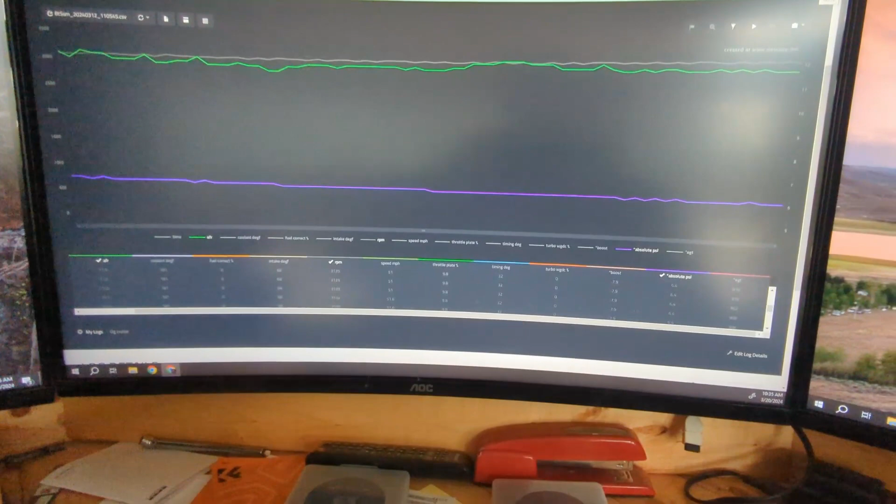Hey guys, you want to see how I use this old laptop, a USB adapter from Tactrix, a tablet, and a PC to tune my truck? Well, I'm going to get into it here now.

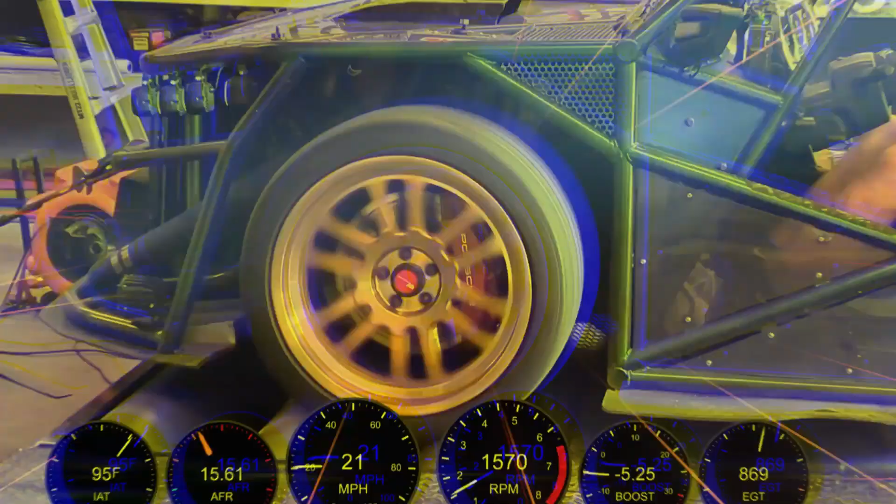Hey guys, today I'm going to give you a quick rundown on how I basically touch up the tune on the truck every once in a while. Now the program I'm running is called Carberry 4.2. Most of you Subaru guys have heard of it. If you're not a Subaru guy, you've probably never heard of it.

But basically it's an updated firmware program on the engine computer itself, derived from an old JDM Rallycross programming that they used in the actual stock ECU of the car. Subaru's always kind of been pretty good with the stock ECUs. Even today, most people still use the stock ECU with an Accessport or something, but I'm still old school. I have a 2002 WRX ECU in my truck and the purple truck,

and they both run the Carberry ROM. And basically how it works is it just breaks down all the stuff you would want to tune in the ECU. Your launch control is a new option. I got an engine light that will blink when I'm getting knock. All the flex fuel stuff's in here. Speed density. I mean, it's a very powerful thing for being 20 years old. Well, Carberry's not 20 years old, but the ECU's 20 years old.

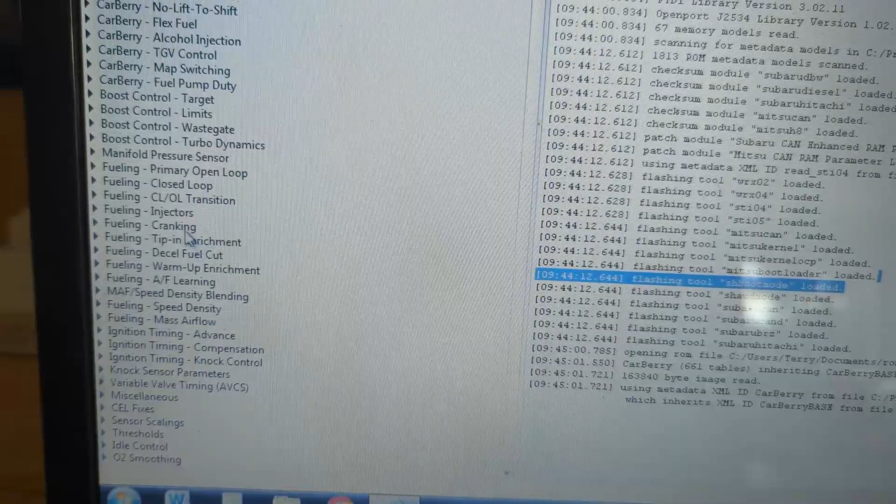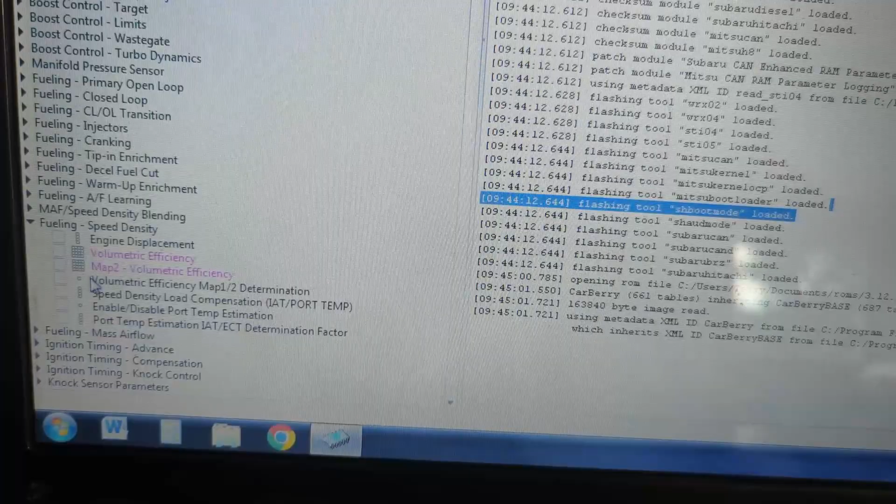Tip in, decel. This is overrun to some newer guys. Warm up, AF learning. I don't use AF learning. My wideband hasn't been reliable enough to use that. And then speed density. This is basically where I make fueling changes. Now you got two. You got your base one. That's for pump gas, and then you got map 2. And that's for ethanol. And then this little guy here tells you which one of these for flex fuel.

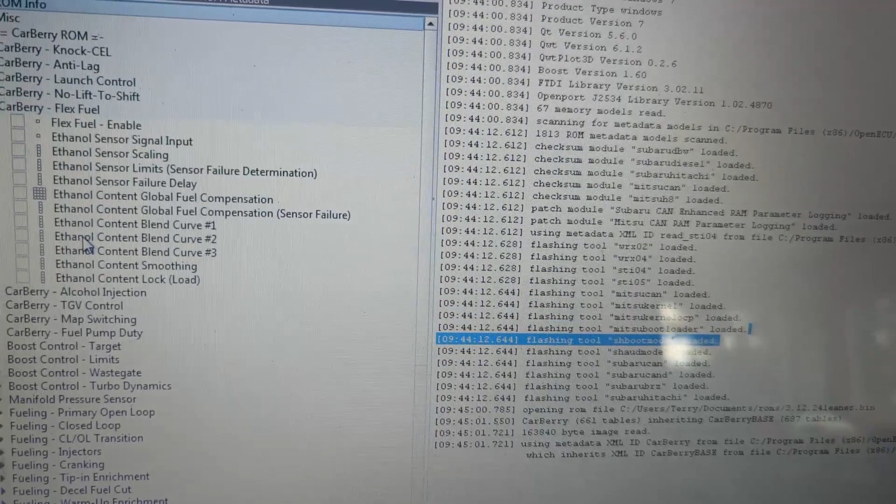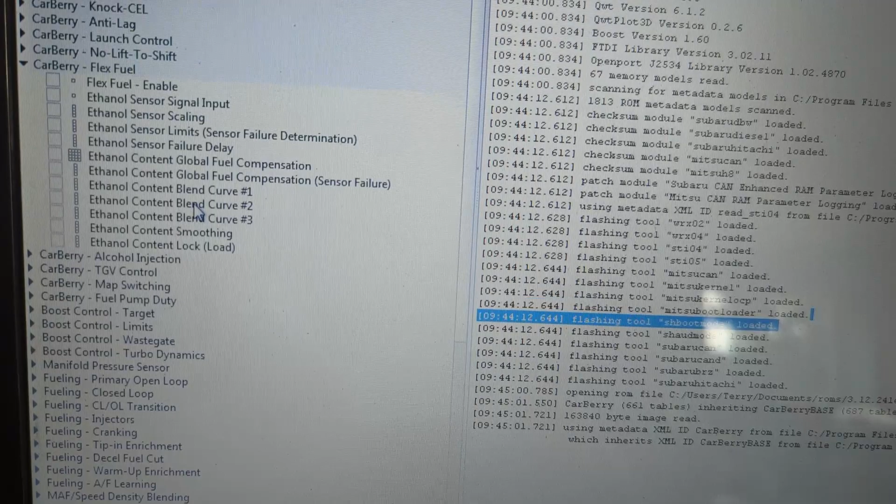Up here I can set up different curves. So if you wanted boost to come on faster than fueling, then you can set up a number 2 and say, hey, I want full boost at 50% ethanol instead of 70% ethanol, like if you'd use curve 1 for fueling, because it lets you set up linear curves or non-linear curves based on what you want to do, which is a nice feature. It's actually a really nice feature.

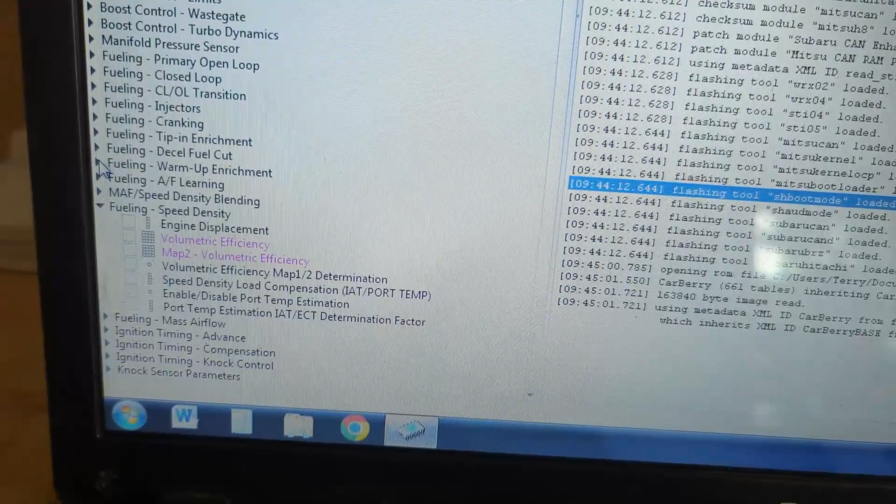So your boost doesn't have to follow a linear curve. Like at 50%, you can run full boost if you want, or you can set it back so you only run full boost at over 80% ethanol. It's all up to you or the tuner. But now you're wondering, how do I know what to change? The speed density table I've been working on a long time.

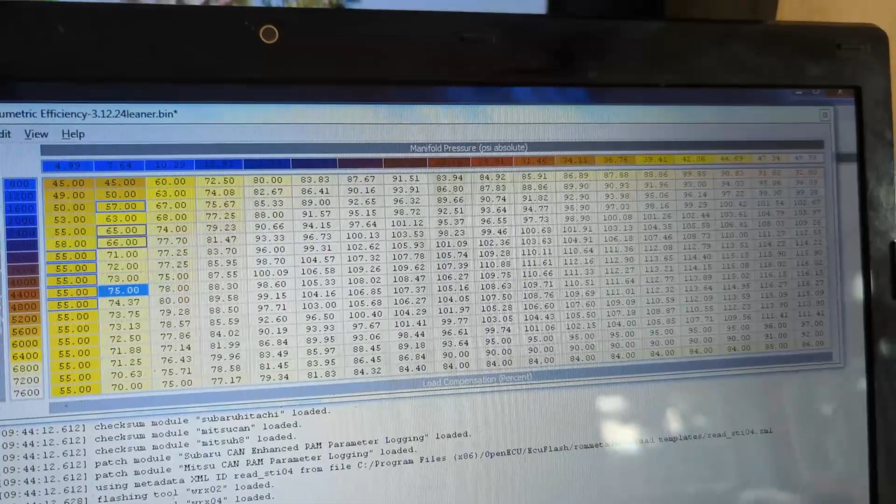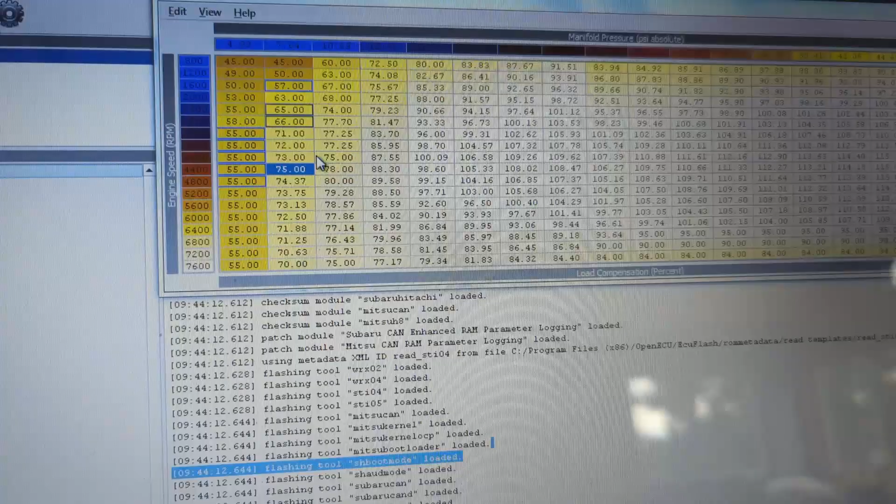You can see these. This is ECUFlash. You can do this in RomRaider too, but I've just gotten used to using ECUFlash because I open it and then I flash it right. This program will open it, edit it, and flash it back to the car all on its own. I've been learning the GM LS stuff. You need like 5 different apps to do this.

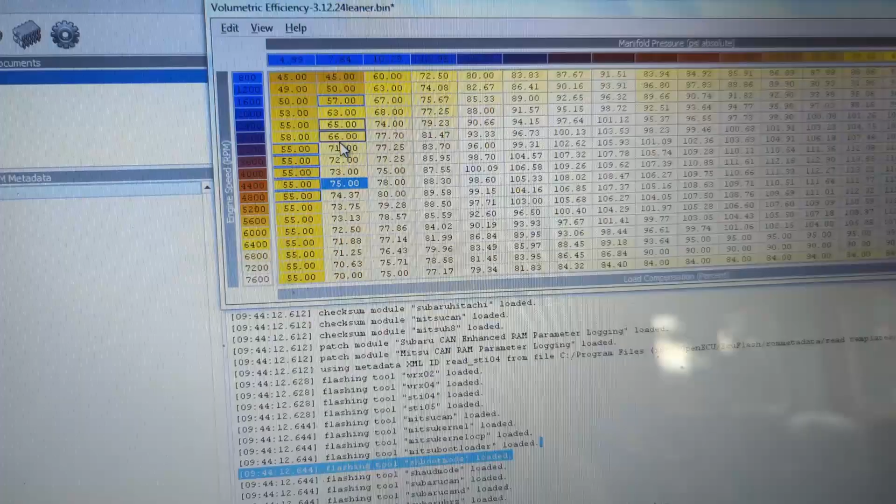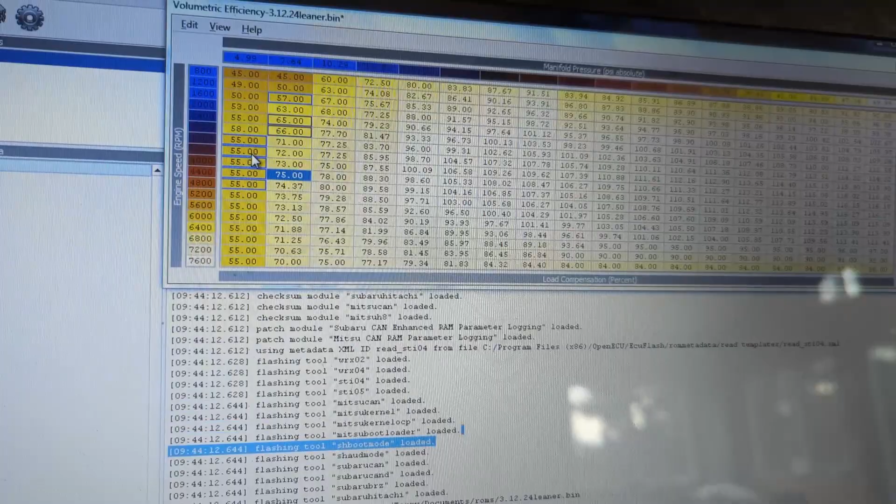But these little changes here I made are just some cruise stuff. I was watching AFRs while I was just lightly cruising down the road the other day, and I noticed that they weren't quite right.

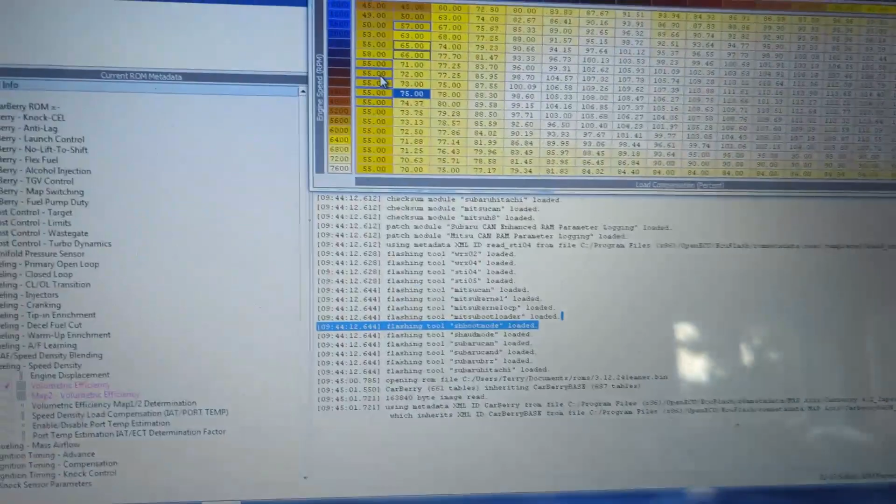This ROM was initially tuned by me, and then once I got over 500 wheel horsepower, I took it out to Nate at TPG, who ran it on his dyno and tweaked the timing, the ignition timing map, stuff you can't do on the street, to really dial these in. Trying to get the most power out of them: do you have too much ignition timing, you're just wasting cylinder pressure, or not enough, you're raising EGTs and wasting power.

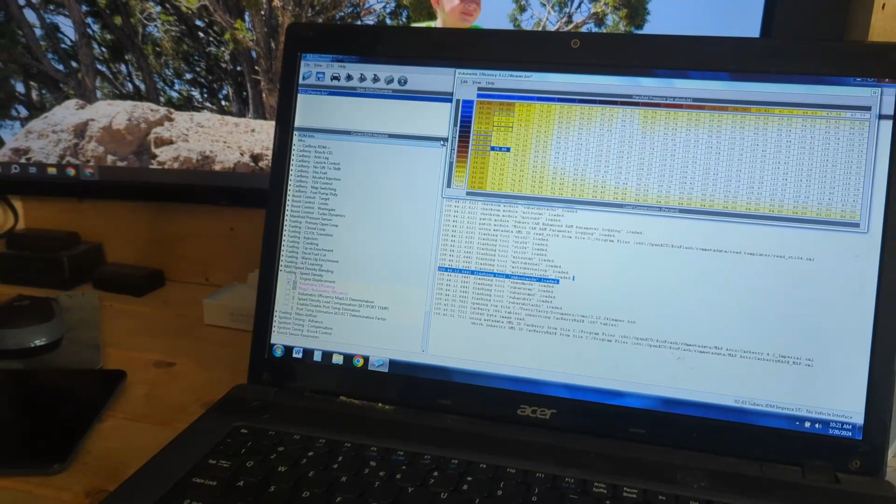So it went on the dyno and got tuned up, but that was when it was on a 450 fuel pump with 6 AN lines. It did make 519 wheel horsepower, I think, on E70, but it was starting to lean out up top. I ran it like that for a while, and then into the summer, as ethanol contents got higher, into the 80%ish, 82% ethanol, it was really getting lean up top. So obviously I had to fix that.

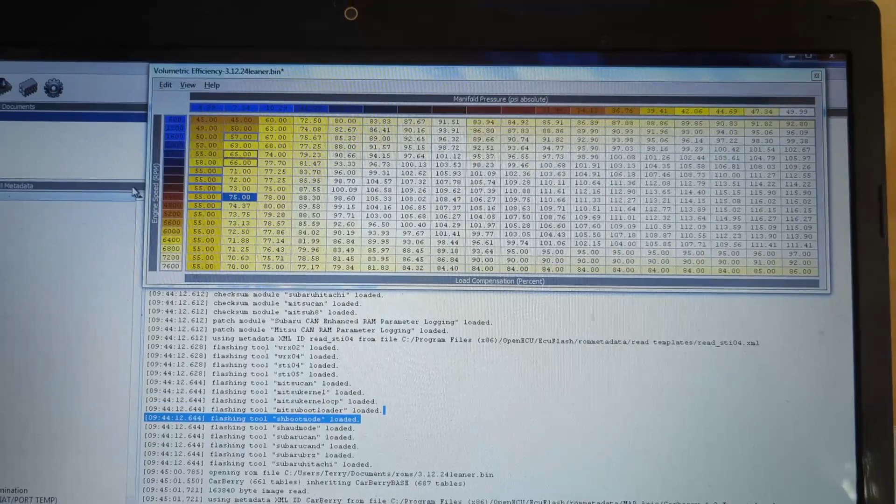I put in twin Hellcat 525 pumps, also known as the Walbro 470s, and then I put in 8 AN lines and basically revamped the whole fuel system. And what that did was completely screw up the pro-tuned volumetric efficiency table. I was way over VE'd on most of it, because it was trying to make up for the lack of fuel pressure up top. So I've done all that.

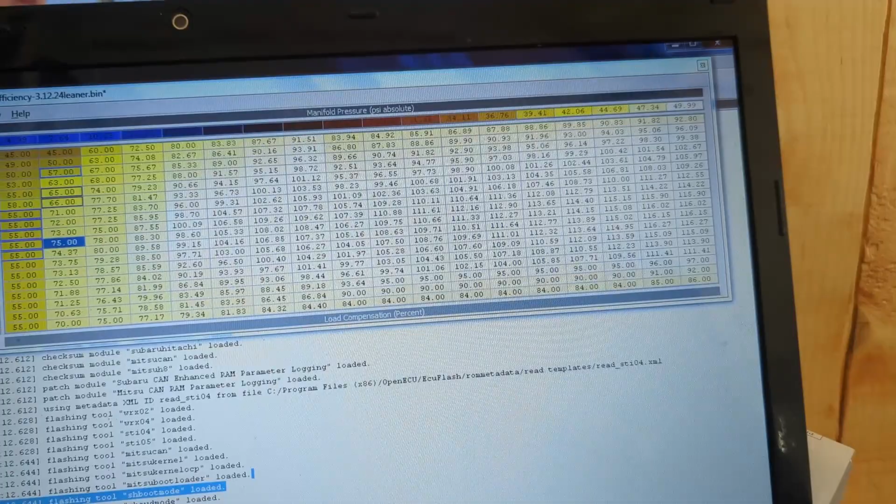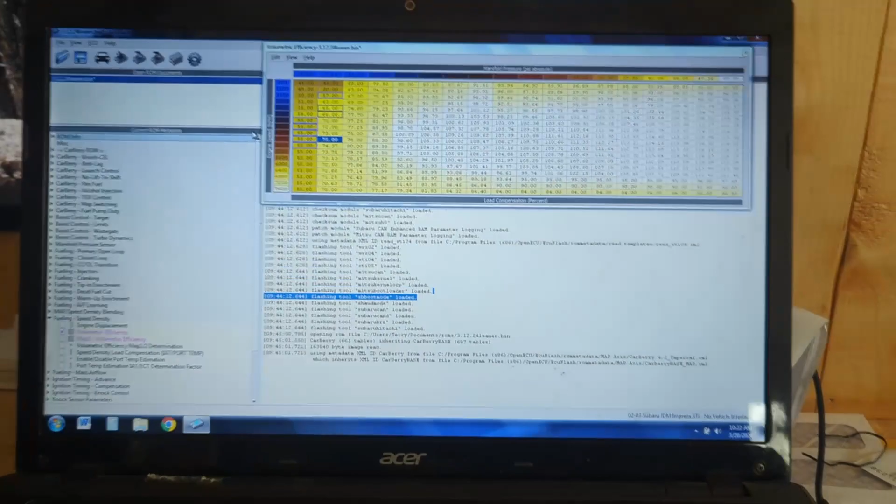Basically I focused on up top stuff at first because it was a priority, then I let it go for a while, but lately I've been focusing more on the drivability stuff. And even though fuel pressure is the same, I guess the flow, maybe the 8 AN lines, the whole map became too rich. So now I'm leaning out areas.

And how I noticed that is I run an app called BTSSM on this tablet. Some of you guys have probably seen it in the truck. It's not connected now, so I gotta manually connect it. Select vehicle. Okay. And these are basically the gauges I run all the time. As soon as I start the truck, the USB input senses the extra power and automatically runs this program.

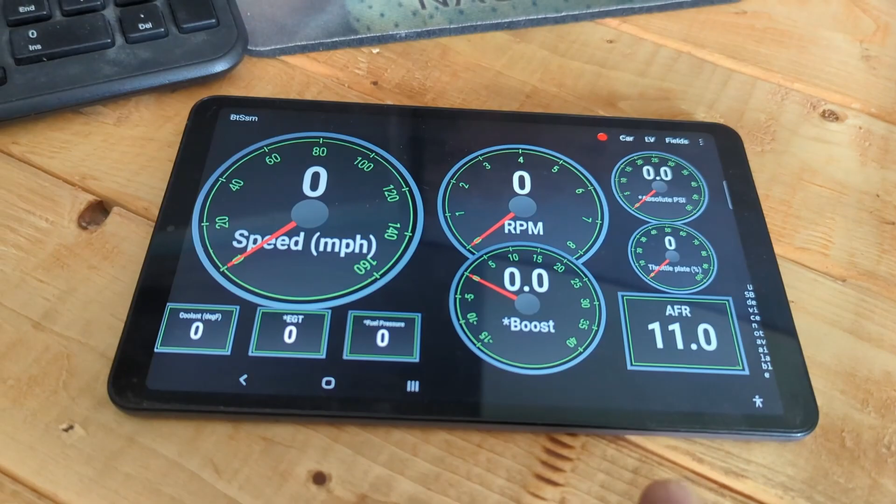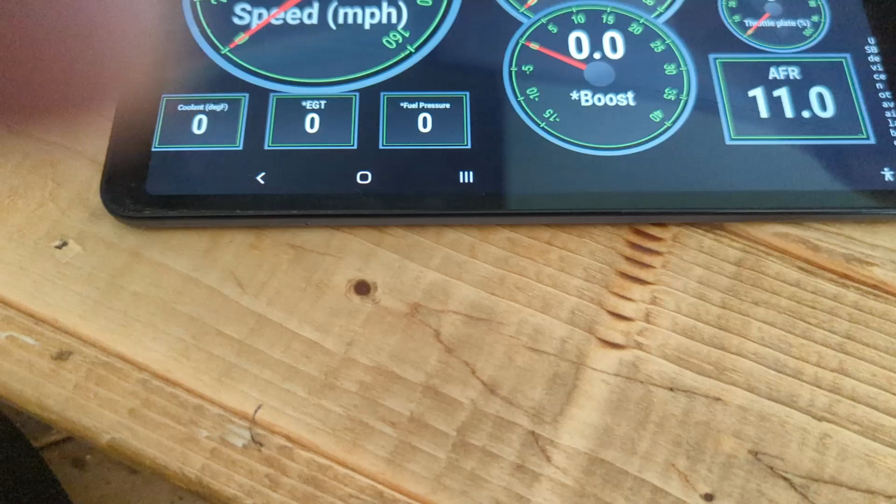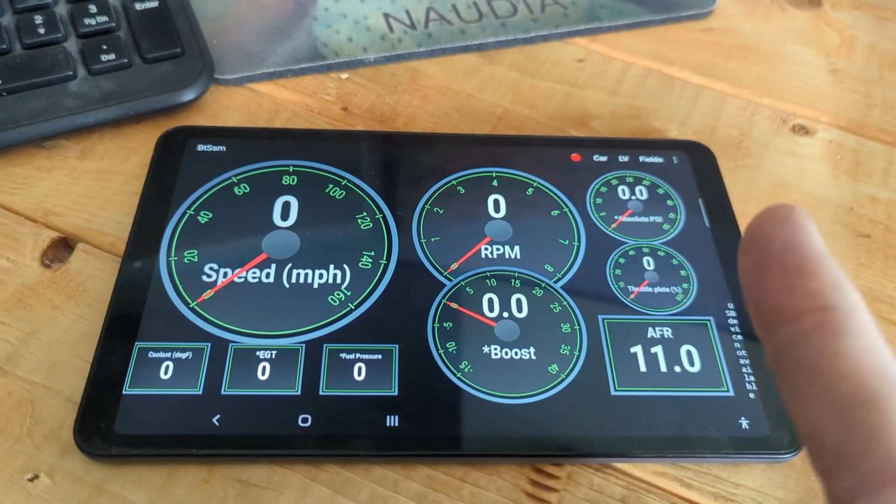And on the steering wheel, you'll notice I have a little green button down there. I push that when I want to log something, and this screen will turn yellow, but you can change the color. It saves it into the program, into the tablet. And this is a 5G tablet, so I can upload it whenever. But if you don't have 5G, once you get on Wi-Fi, you can go to,

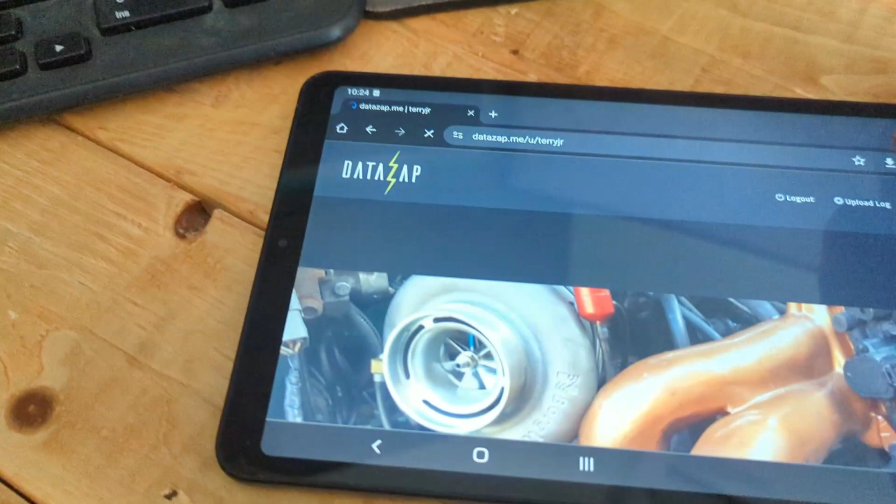what I use is Datazap, and from there, oh, didn't want to do that. Gotta hide my login real quick. From there, you can hit upload log. I'll just use the top one, CSV, then hit browse, files, and my recents are right here, and you can upload that. And go back to here, and you get a log file.

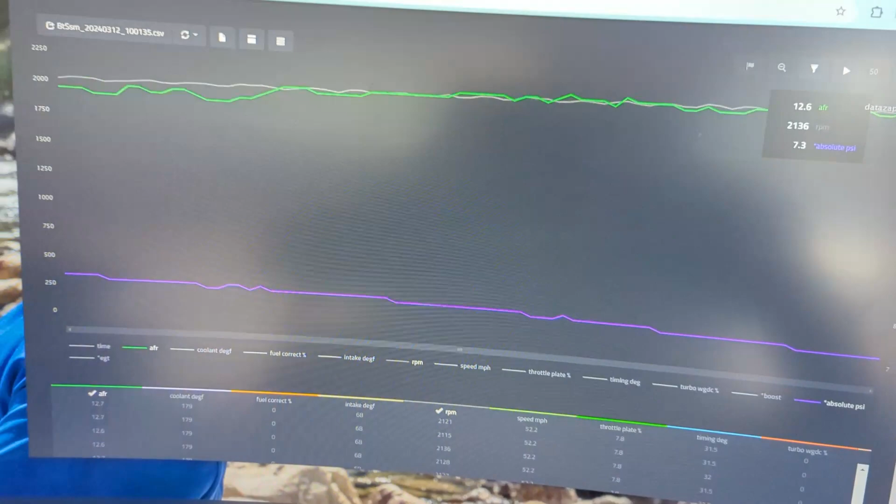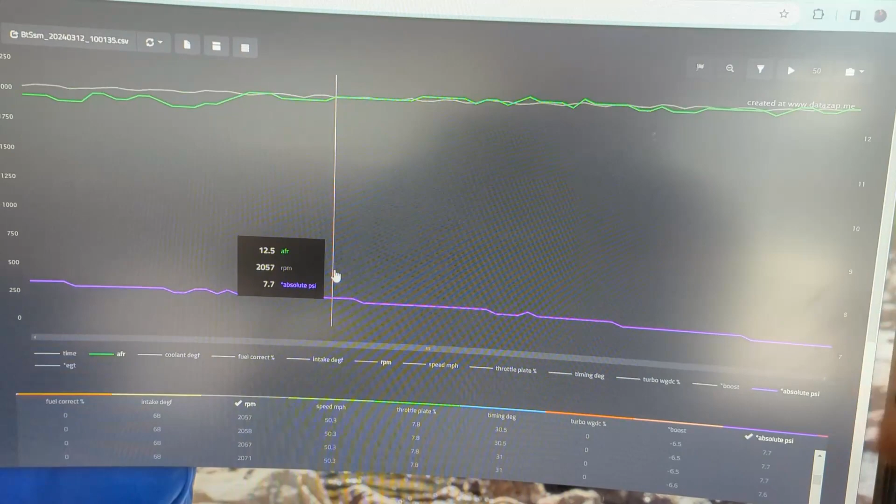I don't really use the tablet to look at the logs. I'll go onto the computer since you just uploaded it. Like this one here, see it, 2,000 RPM, 7.7 pounds of absolute pressure. Now that's absolute, so it's actually like -7 PSI. It's in vacuum while you're cruising. I'm at like 12.5 AFR. So I look at that.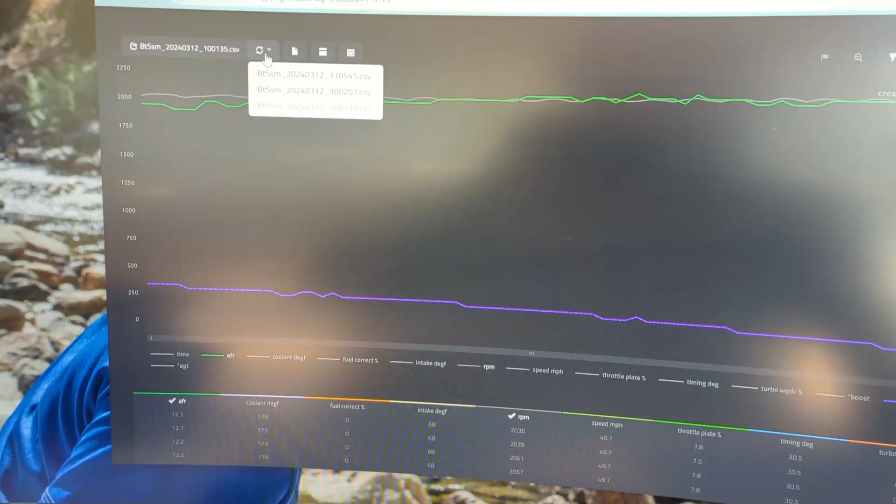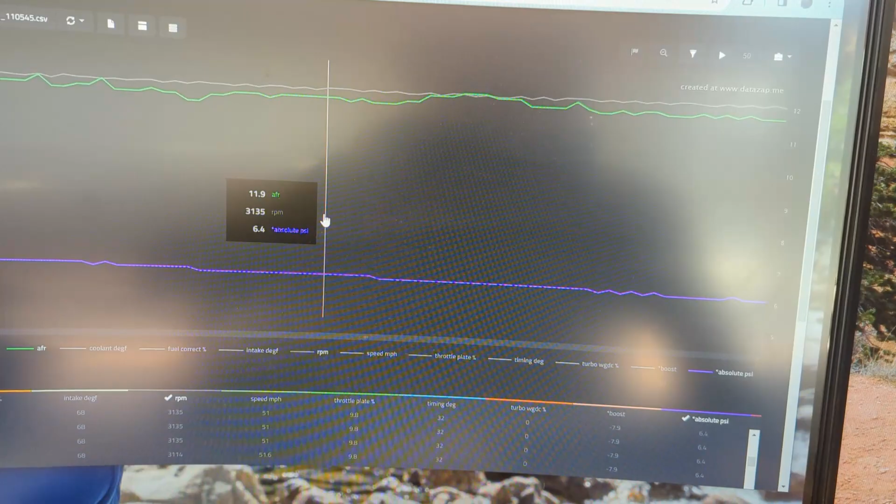I've also recorded a couple different versions. Is this weird? There's another one here. Where'd it go? Notice on this version at 3,000 RPM, pick AFR, pick absolute PSI. Must be another one. It's still rich here too. So I go on my little guy here and say, alright, at 3,000 RPM, let's say I was at 71 VE, I'm too rich. You can calculate it out.

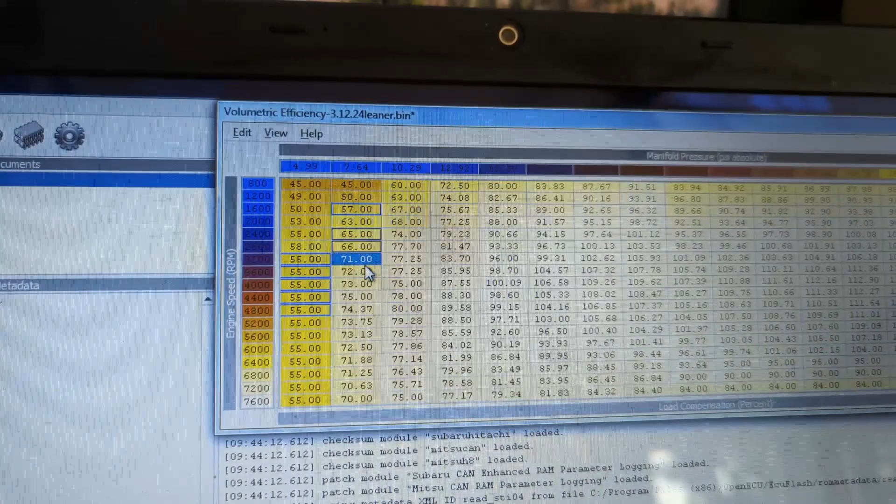You know, you take your AFR divided by your VE, and then you use that as a multiplier for the 71. But I found that to not be too accurate. It always seems to be too much. Like 12.5 or 12 divided by might be like 15%. If I took 15% off of this, I'd be, let's just say, around 60, and then I'd be way lean. So I found out it's about half, but I kind of just fudge it.

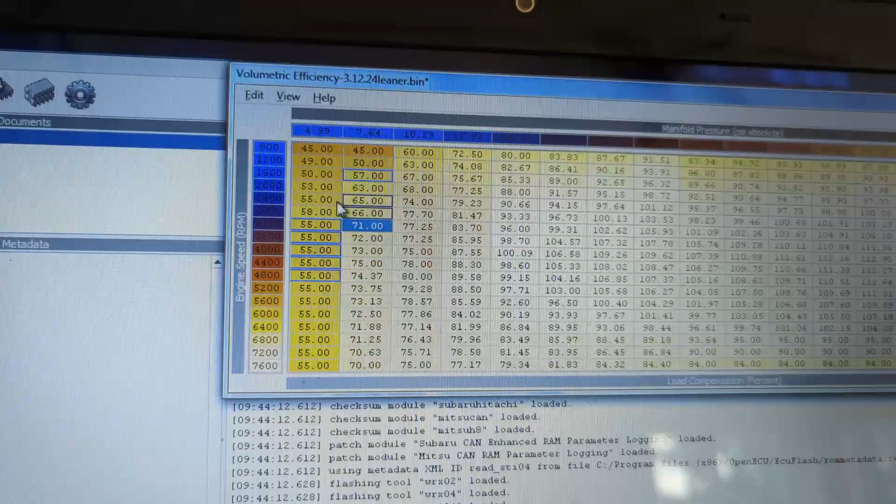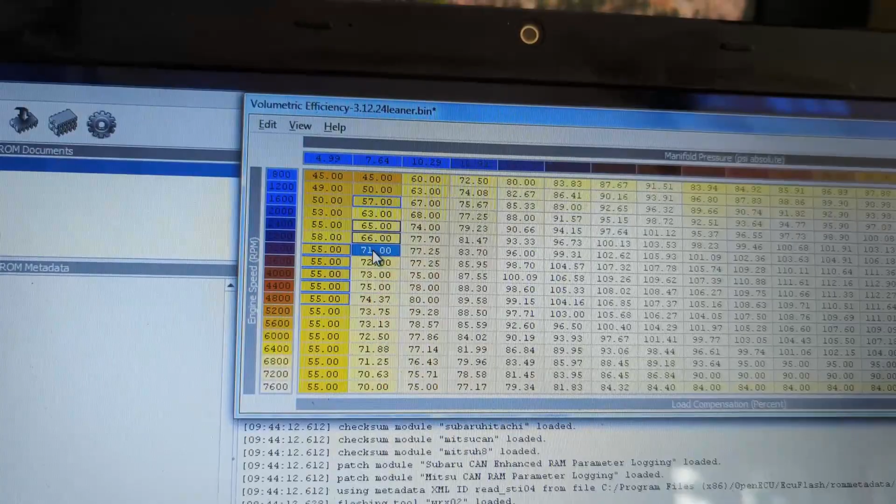Let's say if I'm at 12.5 AFR here consistently, and I want to be at 14.5, 14.7, depending on the fuel I'm using, I might drop that to like 66, like I did above. So that's just how you do it. It's a lot of playing around. I mean, more experience obviously would help.

You run this, you can run it through some programs. There's some spreadsheets out there and stuff, but I never use them. I have the computer, I got the Easy Logger, I have ECUFlash, and I just do trial and error. I'm just constantly playing with it. It gives me something to do.

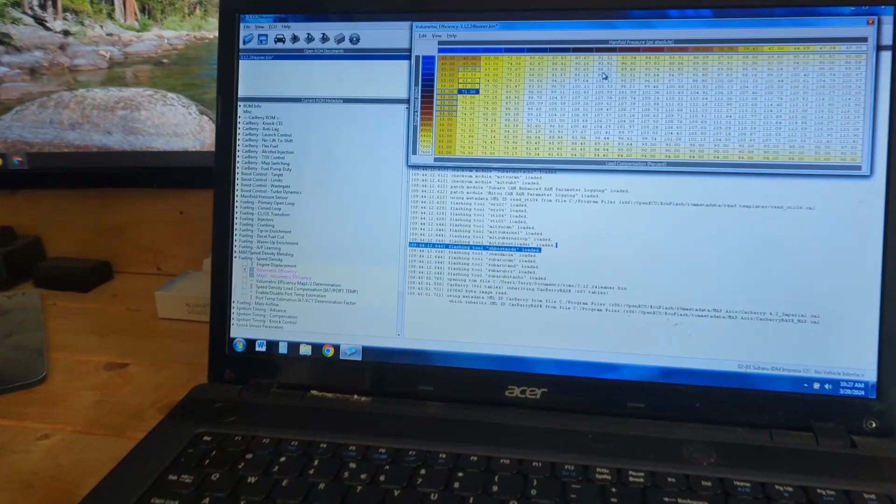And then, so I've made these changes. I'm actually going to work on this a little bit. I've never noticed this. I don't like that at all. Oh, there's like a weird spike here. I'll interpolate that out. And then once I save this to a new file, we'll go down into the garage and I'll show you how I put it on the ECU.

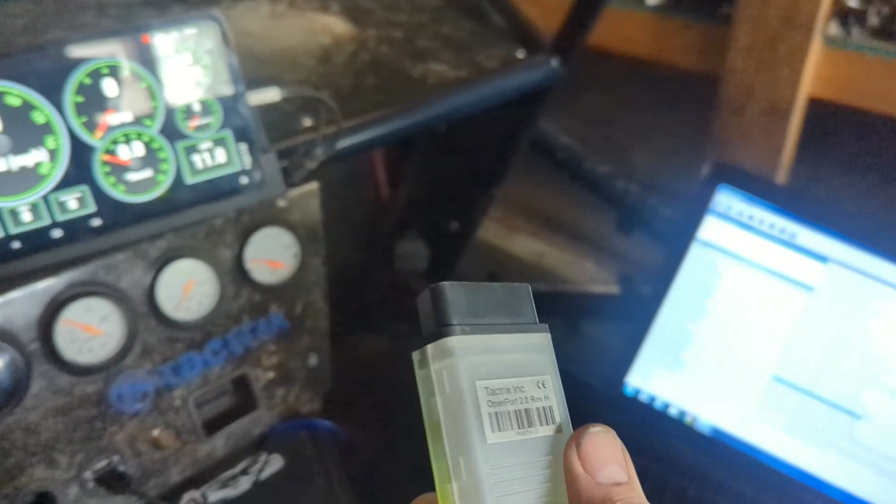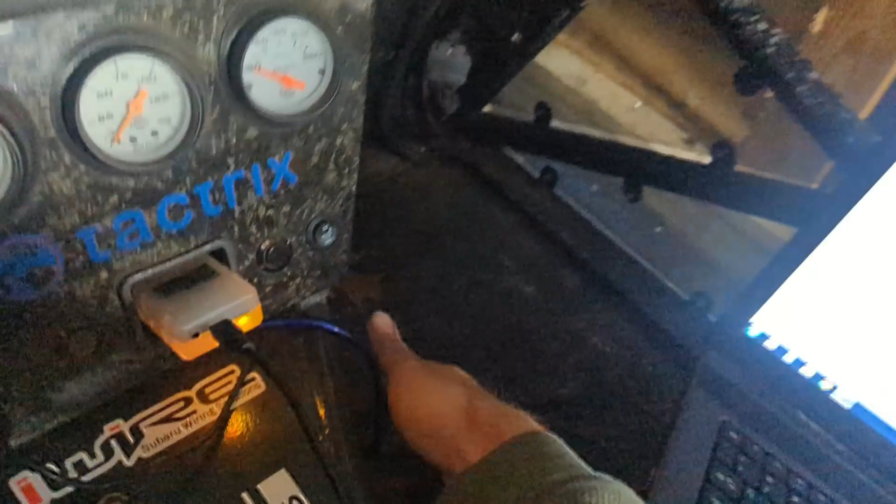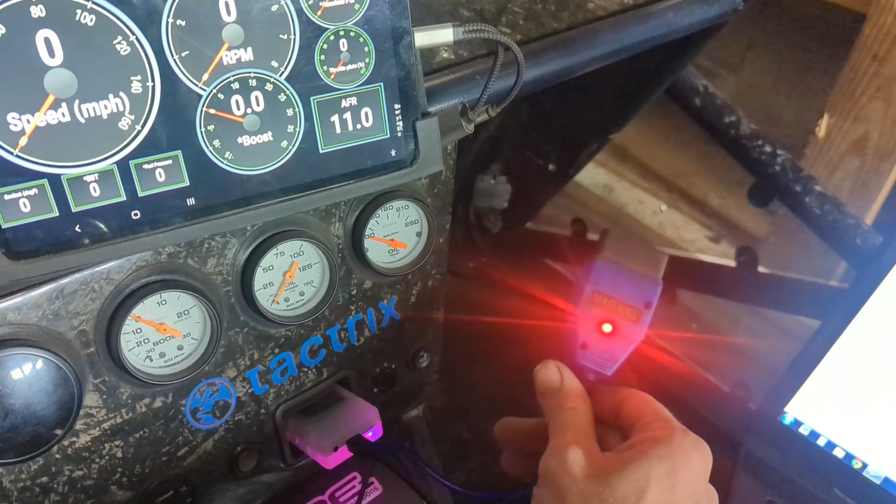All right, I'm back. Basically this is a Tactrix cable. Now yours use OBD ports, obviously under the dash. Mine is right here. It's upside down now because I use another one for logging. I actually use this cheap one for logging. It's the one that's connected to this, because this Tactrix cable is not cheap. I don't want to leave it in the car all the time. This will not flash your computer, but it will read it and log it, so that's why that's in here.

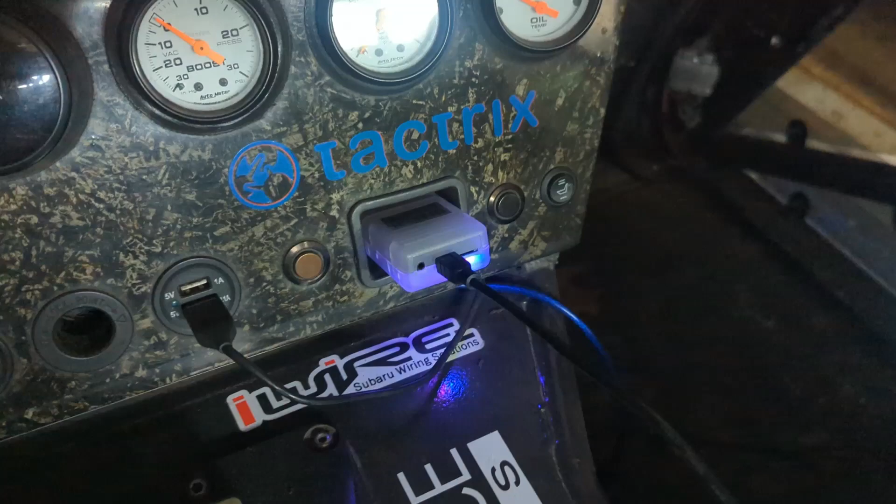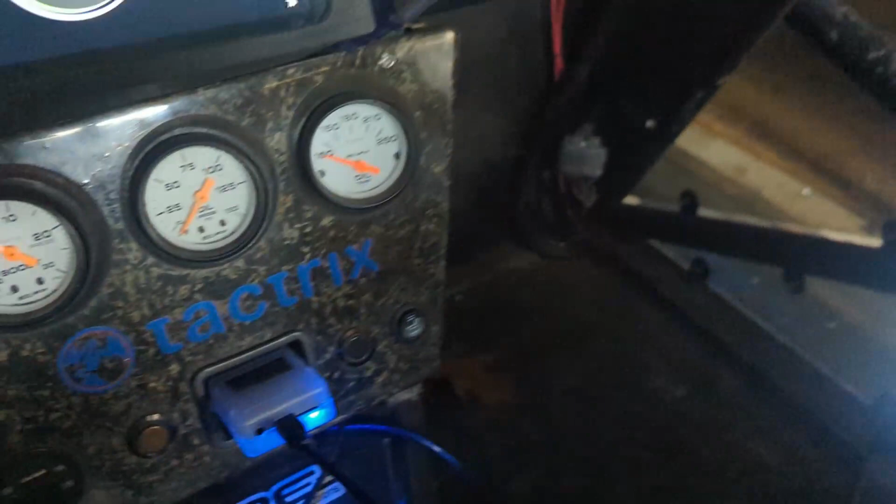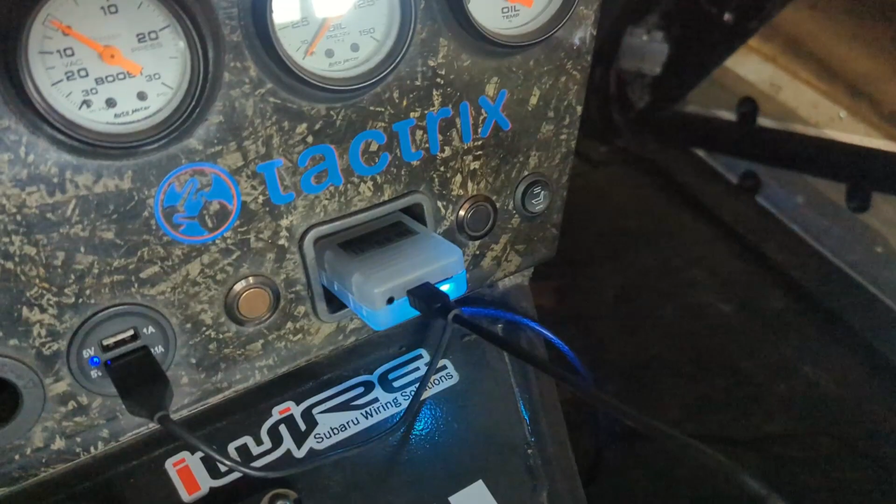Now, basically once I have that in, there's green connectors on the older ones, but I've done this so much that I've put a switch here that connects the ECU, as well as a fuel pump shut off. So I shut off my fuel pump, I turn on my ECU green connectors, and then basically I go here, I hit write image.

On this car each one's a little bit different, I have to hit OK here first, and then I turn the key, and it'll pick up the ECU and just start writing this image or this file to the computer. It just overwrites the one that's in there. Doesn't take long on these old 16-bit ECUs. And that's it.

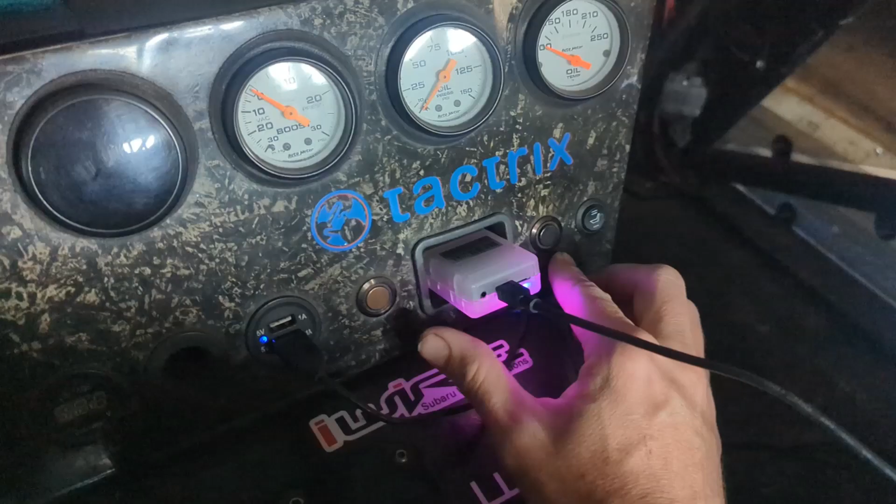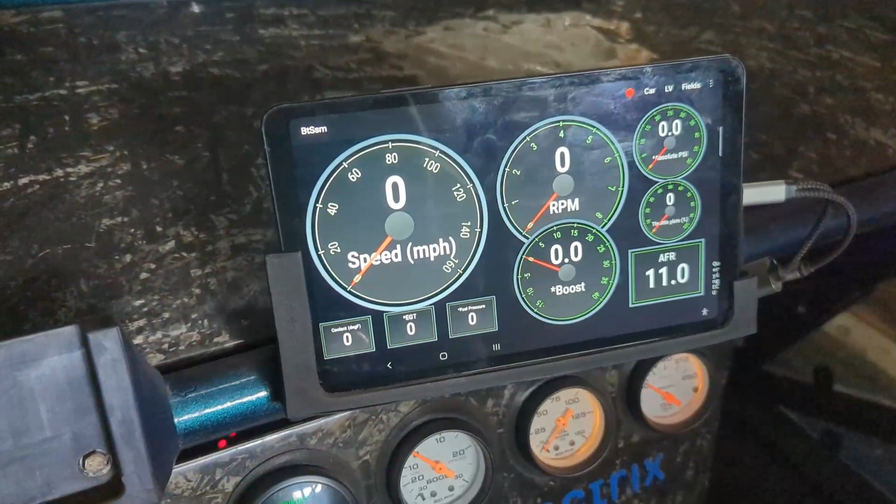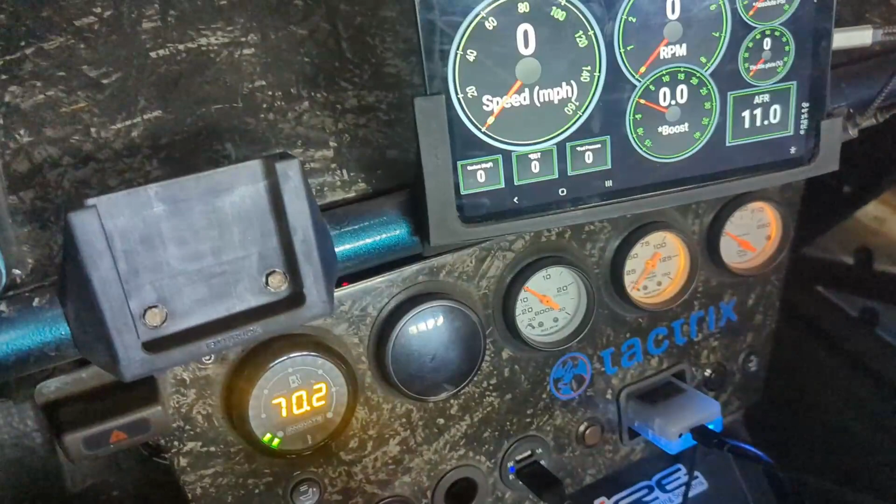Alright, so that's in there. Turn the thing back off, turn the ECU flasher back off, the read write thing. And I would normally turn the fuel pump back on, but now I'll show you when I turn the key. Hang on. What's that? Still had the thing pushed in. I don't know what it did. Alright, I don't know what I did, but the fuel pump's on. I'm gonna pull this one back out.

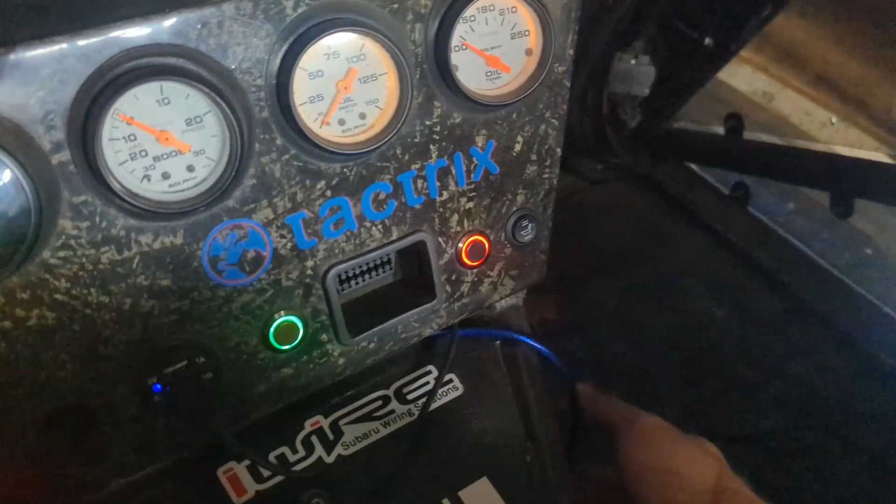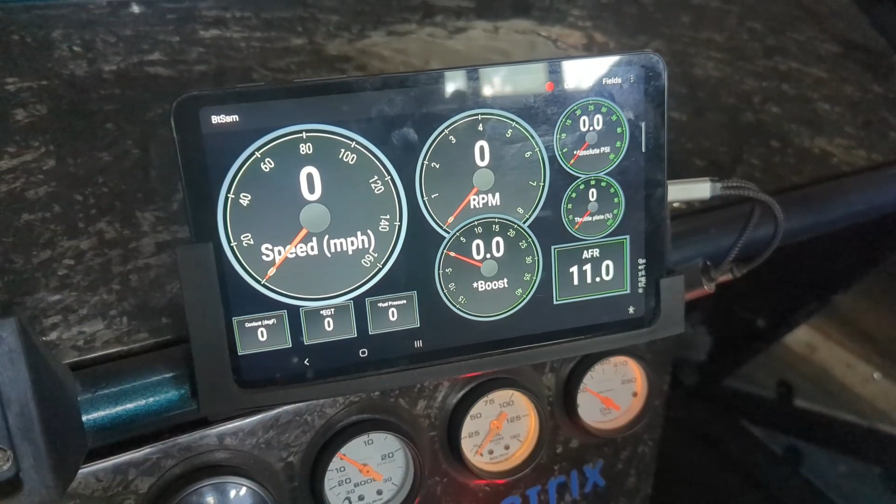I'll plug this one back in. And it will connect eventually. Probably not now that I already had the thing on. I'll turn the key on. Oh, whatever. It's grumpy. But it normally connects to the ECU automatically.

You see now I'm at 70% ethanol. The wideband just quit working a while ago. I guess I need another new sensor. Probably like the 6th sensor I've had to put on this stupid thing. But that's how you do it.

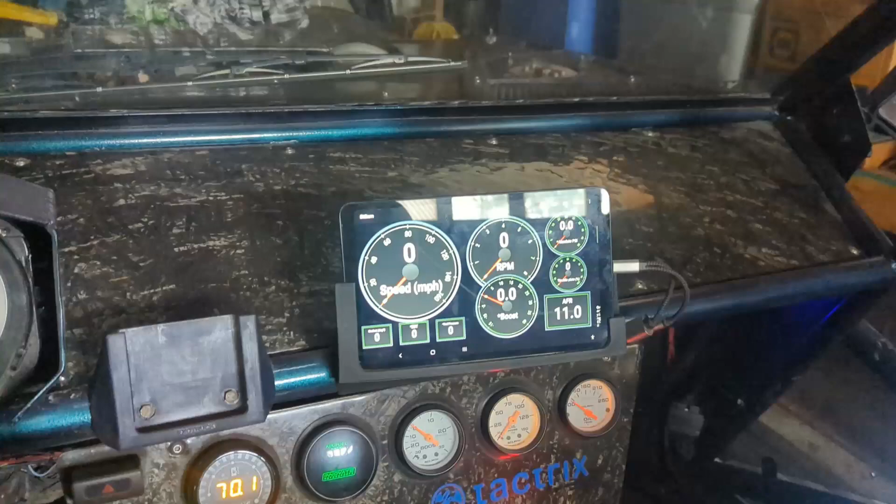And then, like I said before, when I push this button here, it will start logging. Oh, the engine has to be on, that's why. But I'm in the garage, not turning it on. But when I push this button, it'll start logging. I upload that, and I use the computer to make changes.

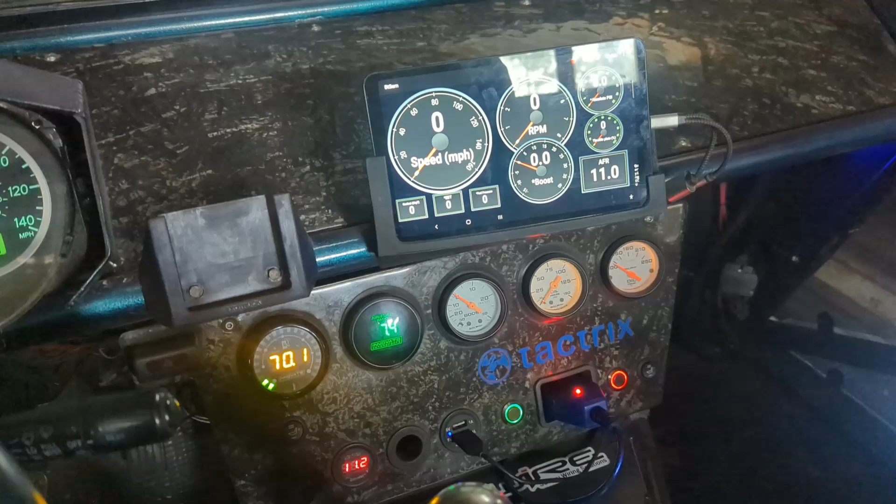This is just an Android tablet with the BTSSM app, the Tactrix Openport 2 cable, ECUFlash. Everything but the cable is pretty much free. And this app, I think the app was $5.